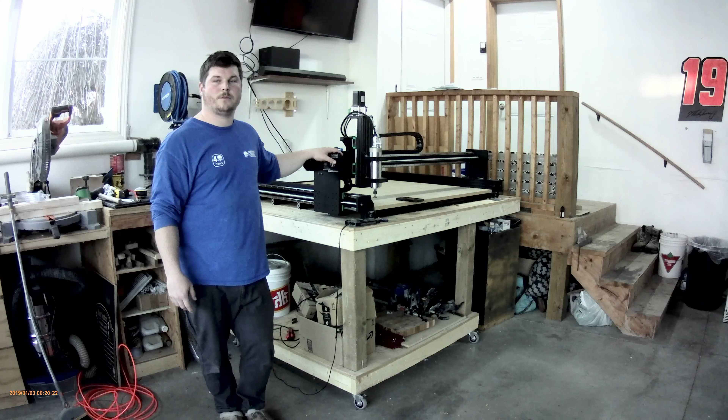Today we're going to surface the spoilboard. We'll jump into Vectric VCarve, and we'll come back out here and run the program. So we'll see you on the other side.

Okay, so we're here in Vectric VCarve Pro 11.013. We're going to have this as a single-sided. We're going to set our width to 48.32, and our height set to 46 inches, and our thickness is going to be 3/4 of an inch. We're going from the material surface, the bottom left-hand corner, and we're going to hit OK.

We're going to make a rectangle here, and it is going to be the same as our dimensions that we made for our workpiece there. So 48.32 and 46. We're going to hit apply. We're going to close out of that, keeping that square selected. We're going to come up here to the alignment tool, and we're going to align to the stock. Close that out.

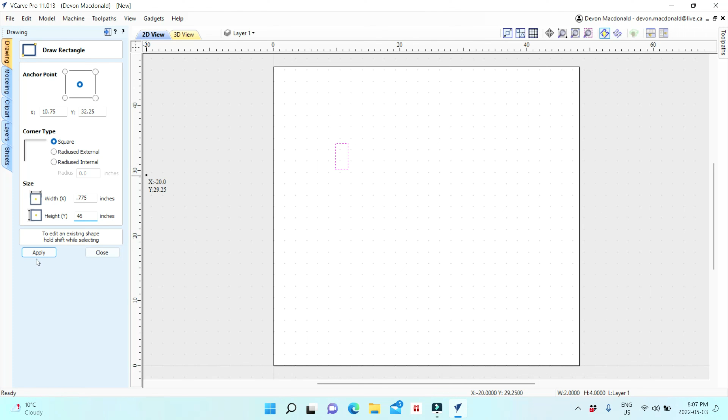I'm going to align that to the stock, and I'm going to move it over to the corner, and it'll snap to our XY position there.

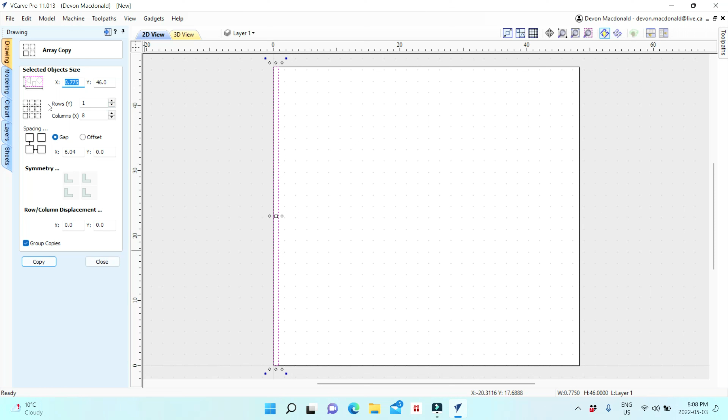Now I'm going to make 8 copies of this, so I'm going to come over here to array copy. We're going to have one row, 8 columns, and we are going to make the X offset at 6.04, and we're going to hit copy. So then it puts all of them where I want them to be.

Now this one is a little out, so I'm just going to ungroup these. I'm going to select this one, and I'm just going to move it over a tiny bit there, just so it's in the box. I'm going to even just snap it to the corner there.

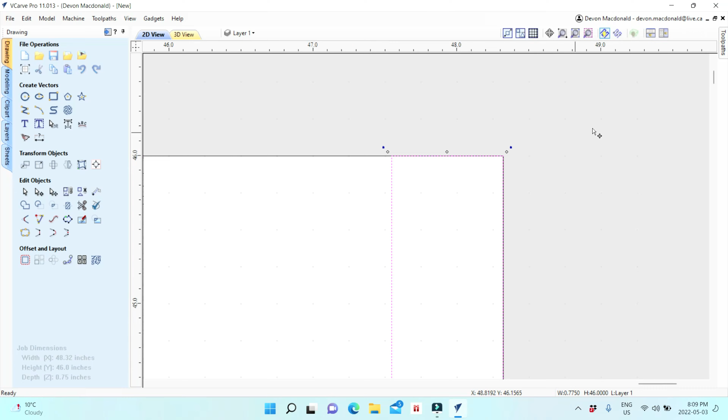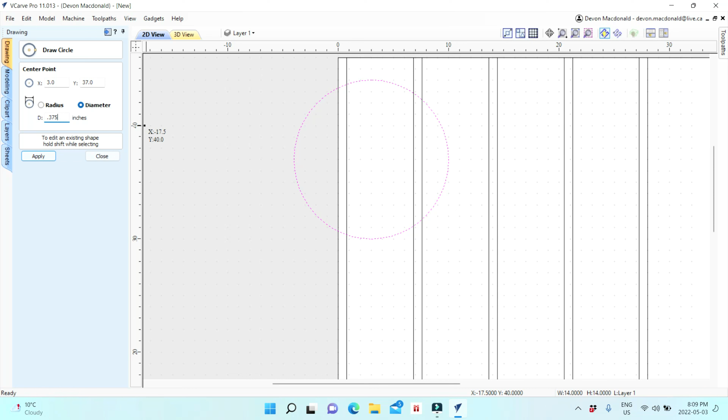Now I'm going to grab my circle tool. I'm going to make a little circle, and it's going to have the diameter of 0.375, because it's 3/8 of an inch, and I'm not changing that. Close out of that, and I'm going to position this down in my bottom corner here.

This will be for my fence. Roughly a 1/2 inch off the edge and 1.25 off the corner.

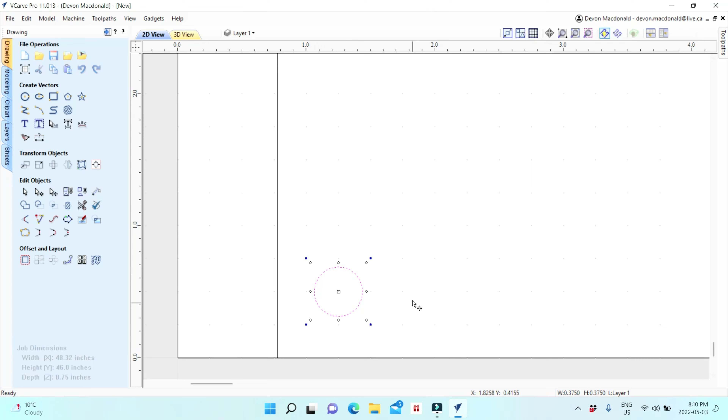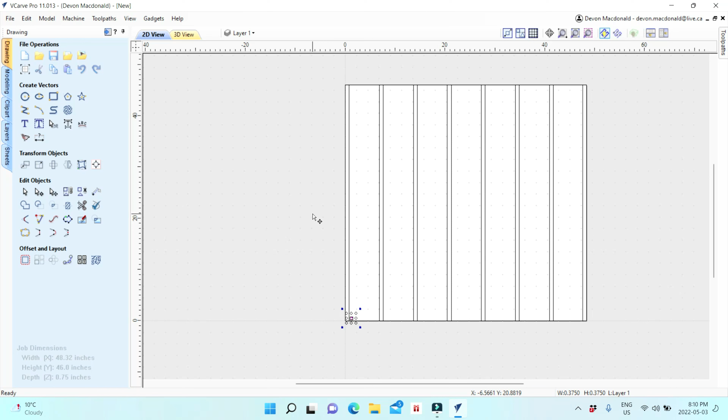So now I'm going to make a copy of these. I'll probably have 8 of them in there as well, on the Y, and 8 of them along the X as well. So we're going to go array copy. We're just going to reverse these numbers, put 8 there for rows, put that to 1, and our spacing is going to be 5.75, and I'm going to hit copy.

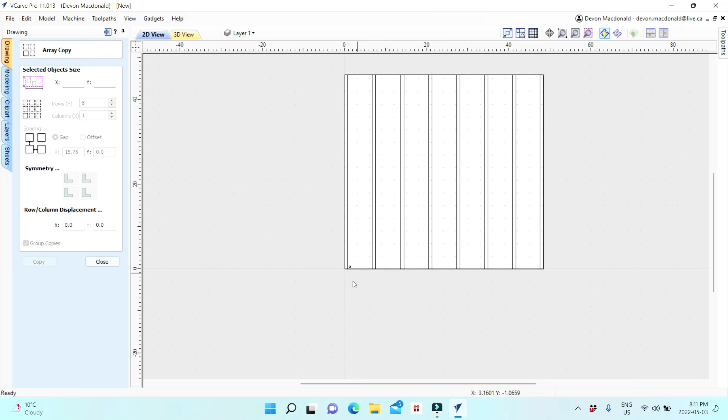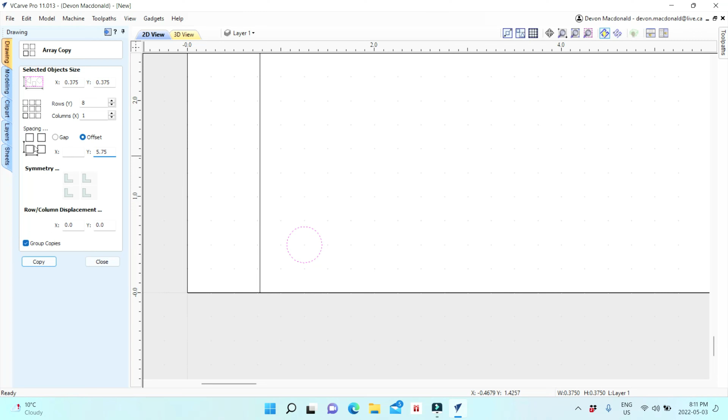That's why I did it on the X, I need it on the Y. Copy. So then I have them along there. And then we're going to reverse these numbers. We're going to put 1 there and 8 columns, and we're going to do it along the X, and it's going to be 6.04. Copy.

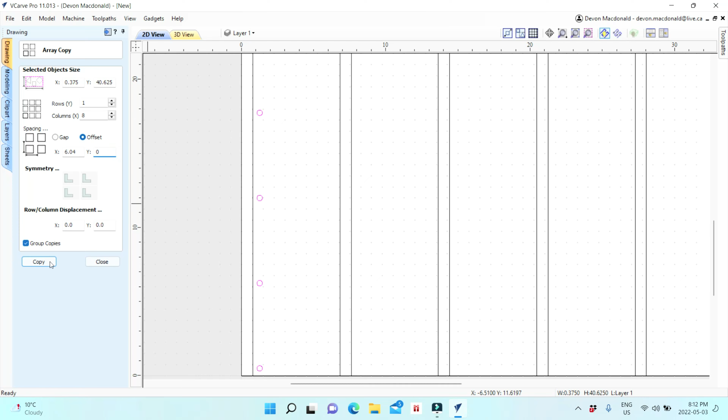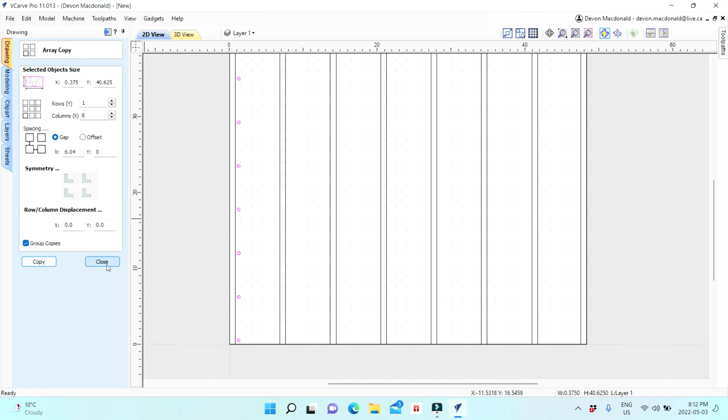And we want this set to be 0. Not sure why it's doing that, 6.04 gap, no. Oh, that's because those are all grouped. So we want to ungroup those. Unselect, come back in here, and we're going to go along the X, and there we go. So these ones ended up inside there.

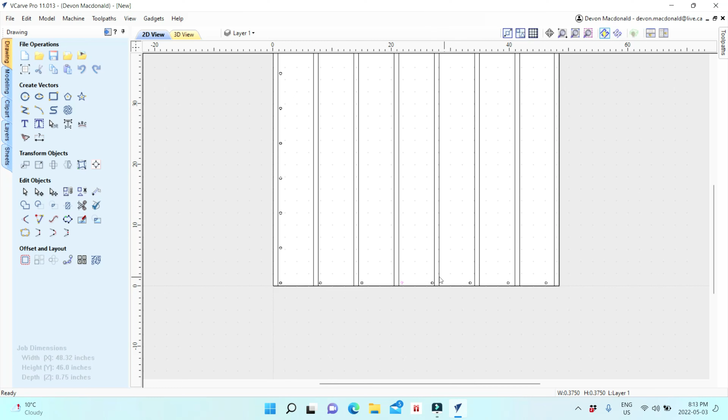So we're just going to ungroup them, grab them, just use the arrow keys, keep it on the same y-axis. This one on the other side. And this one on the other side. I'm actually only going to do 7 down here, we'll delete that one.

Okay, so we're going to make our spoilboard toolpath here first. So we'll select the square at the top, your outside perimeter there. We're going to come over to toolpaths, and we're going to do a pocket toolpath. We'll remove these two. We'll go ahead and select toolpath.

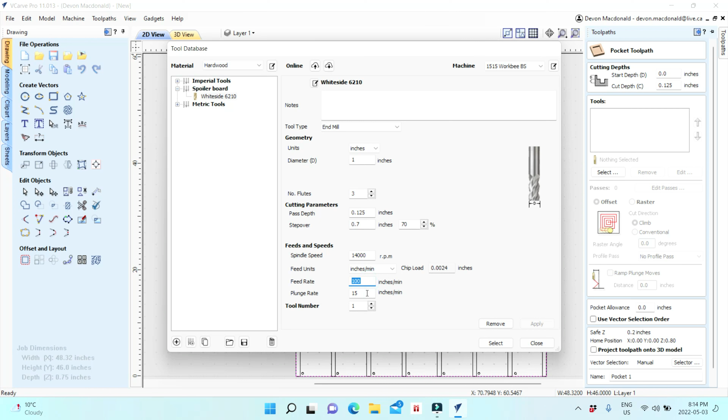We're going to come over here to my spoilboard section there. We're going to get the Whiteside 6210. It's doing a pass depth of 0.125, which is 1/8 of an inch. Our step over is 70%. It's a 1-inch bit, doing it at 14,000 RPMs, a feed rate of 100, and a plunge rate of 15. So we'll select that.

We'll come over here. We're going to do a climb cut. We won't do a ramp in. And we'll go surfacing.

And we'll hit calculate. So it'll show you your toolpath there. And we'll just hit preview all toolpaths. It'll show you the cutting of it.

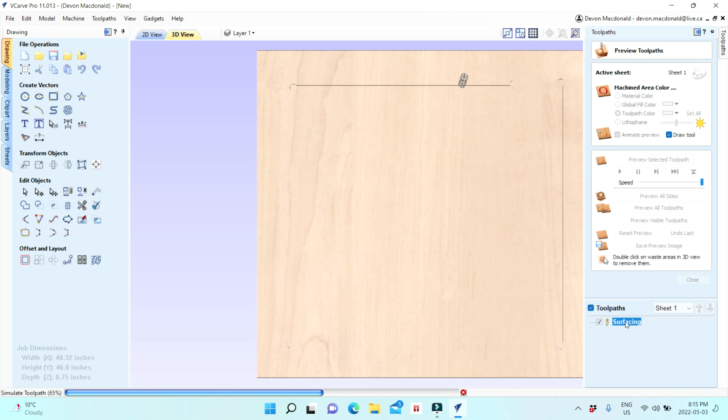If you come down here and hover over this, after that is done simulating, it will take 1 hour and 5 minutes to surface that. So we'll just leave that as is right now.

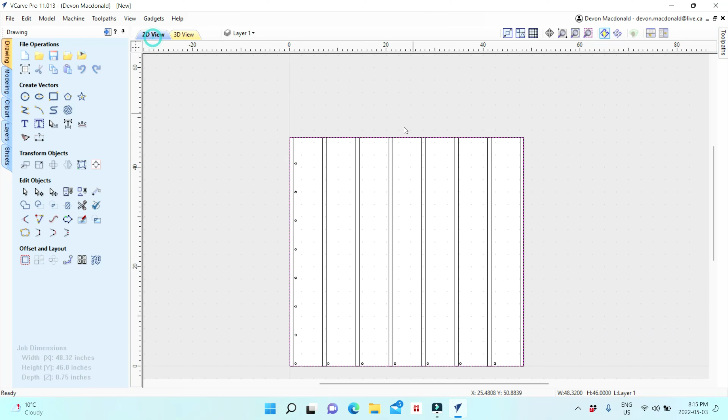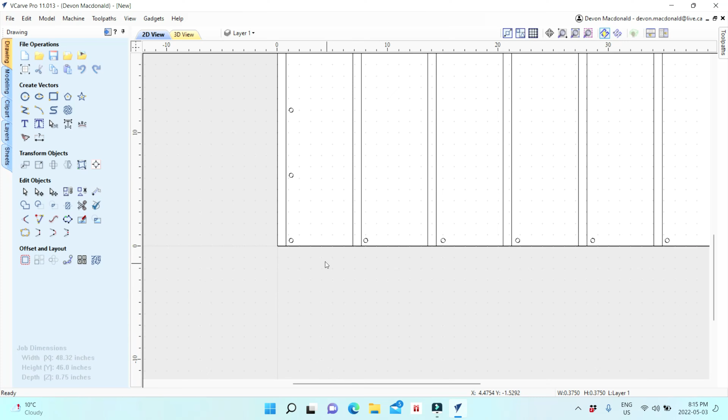We'll come back over to the 2D view here, and we're going to grab all of these pockets and group these back together. So group, and I'm just going to scroll here. Grab all of those. Grab all of these. Unselect those and unselect the outside perimeter, and we're just going to group those.

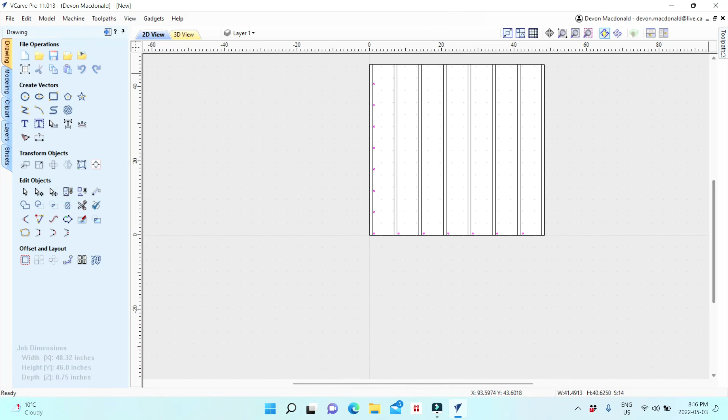We're going to come over here and do the T-Track slots first, and do another pocket toolpath. We're going to remove this one and select a 1/4 inch end mill here. It's 2 flute. I haven't added my new ones to this new computer yet, but it is a downcut bit from Tools Today. I can't remember the number, but it's a 1/4 inch, 2 flute.

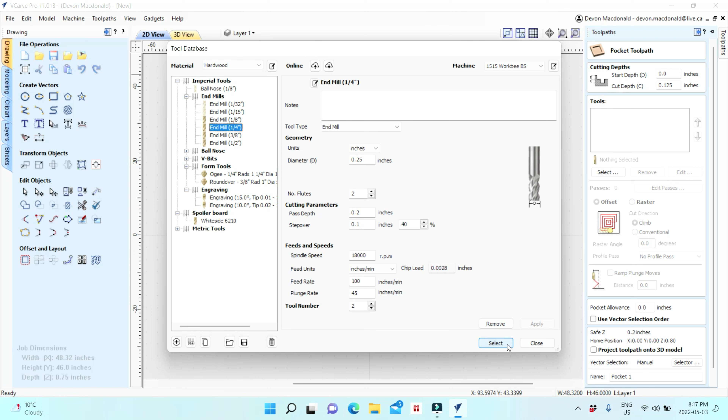Pass depth we're going to do at 0.2. We're going to have 18,000 inches per minute, or RPMs. We're going to do 100 inches per minute with a 45-inch plunge. And we're going to hit apply, and go select. And we're going to go calculate. Oh, I forgot to set my depth. This one we're going to go down to 0.5 inches. Calculate.

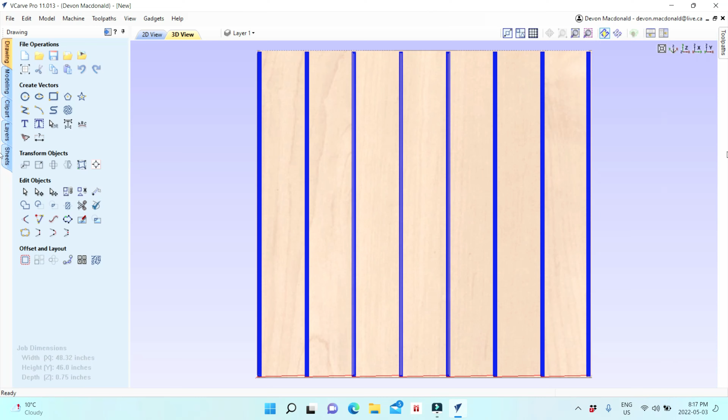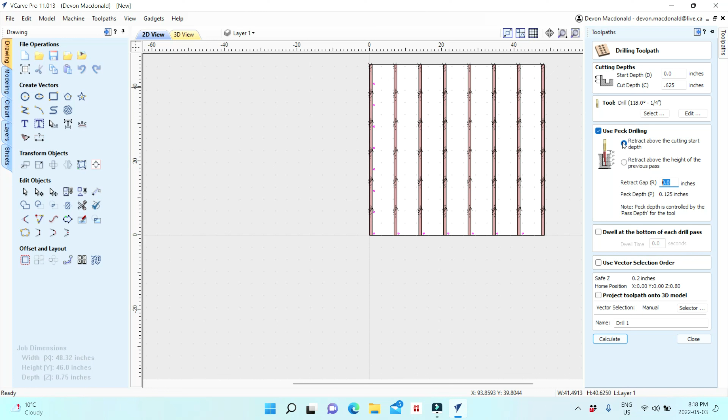Then we'll grab the other ones that are all grouped together, and come over here to do a drilling toolpath. It takes a little bit longer, but we're going to go down 0.625 of an inch, and use a 1/4 inch drill bit with peck drilling. We're going to use an upcut bit for this, hit calculate, and preview all toolpaths.

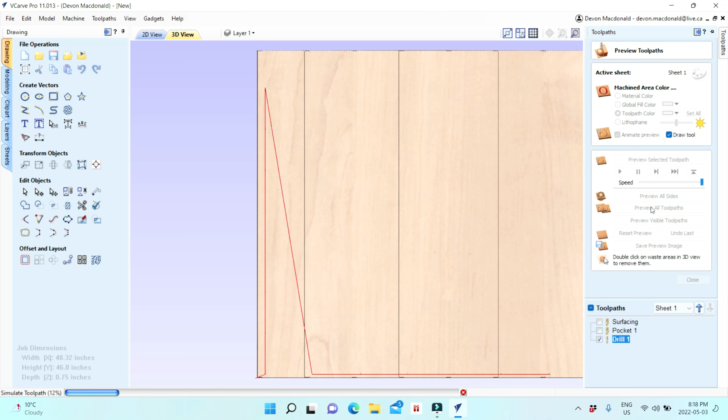Now it's doing the pockets there of the T-Tracks, and now it's drilling the holes. And there you go. So our T-Track will sit right in there, and that's why there was a little lip, because that one's not perfectly parallel with the corner.

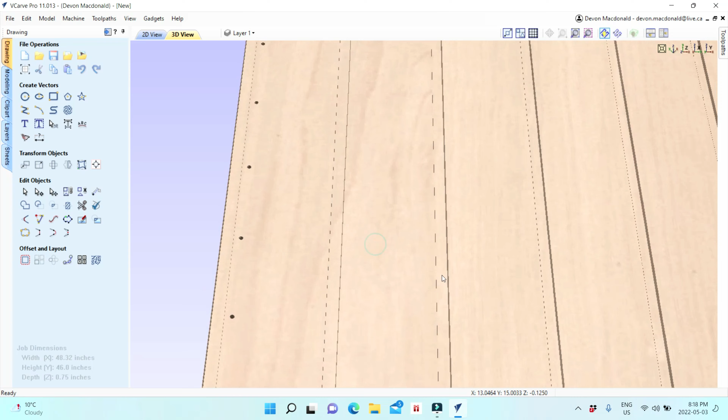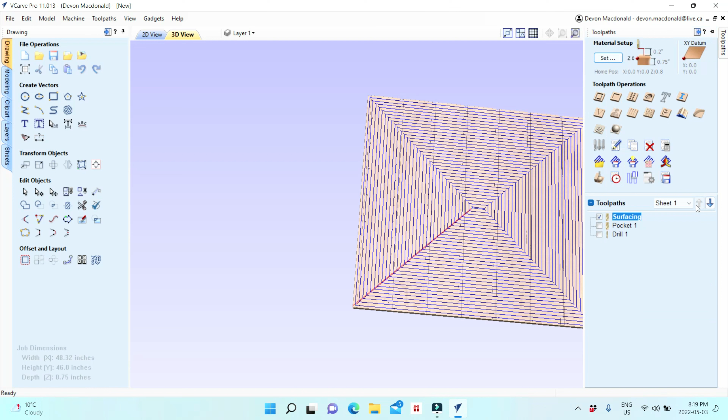But we're going to run our surfacing toolpath just in this first, and then we'll do another video of the T-Track and the fence install. So let's take this file here. We're just going to unselect these two. We're going to take this one, our surfacing one, close out, and save toolpath. We're using the Openbuilds controller.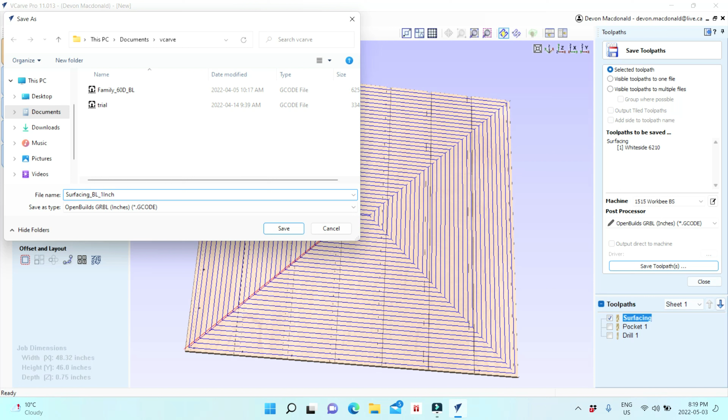And we're going to go save toolpath. We're going to save it in Vcarve, surfacing. I like to give it bottom left corner, 1 inch bit, and save.

Now I'm just going to open up my folder here. Actually, I just want to see if G4P8, so it pauses my spindle for 8 seconds so it can spindle up to the 14,000. That's what I wanted to see. So we'll take this G code out to the Openbuilds controller and run this.

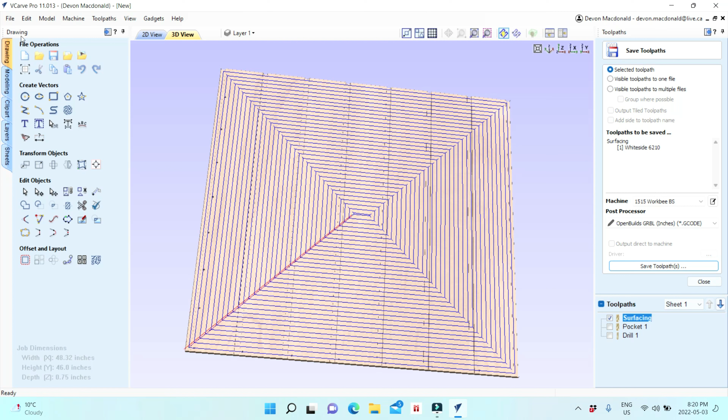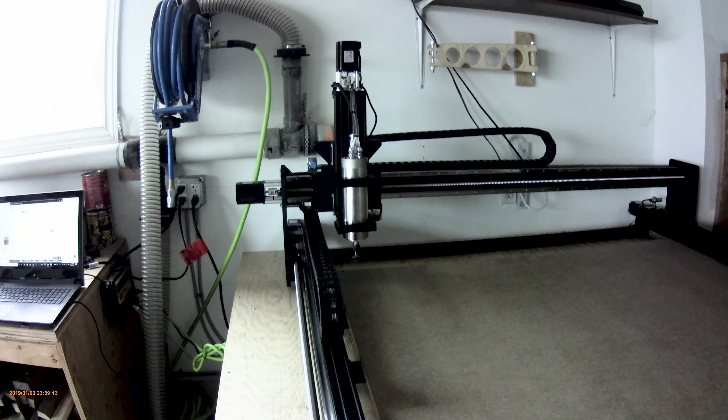Okay, we're back out here in the shop, and we're just going to home all our devices here on the interface. So we're just going to click home all axes. There goes the Z. There goes the X and the Y. And we got everything homed.

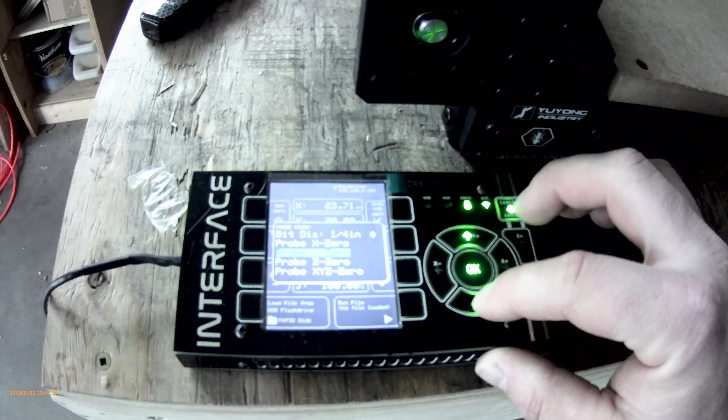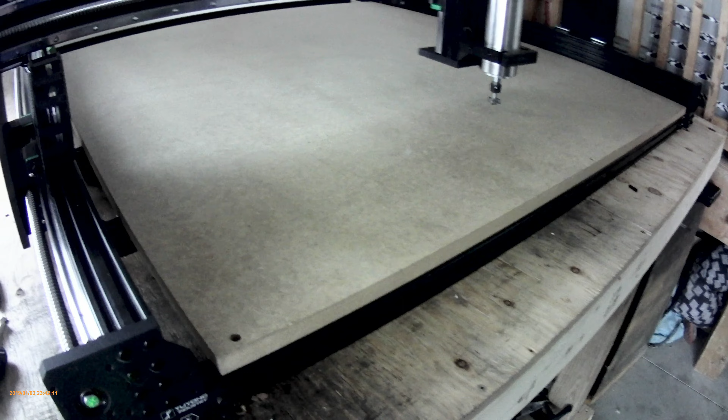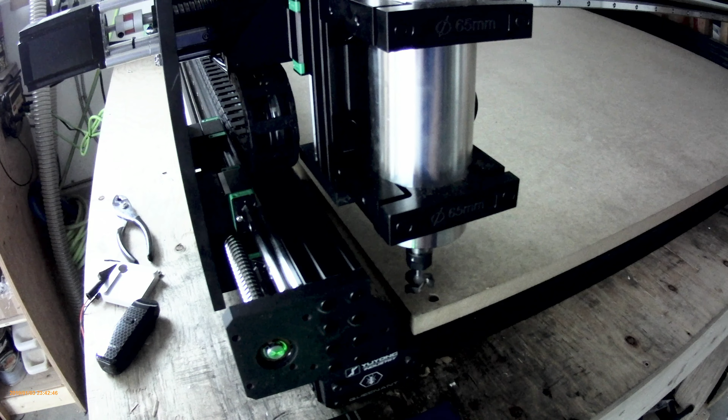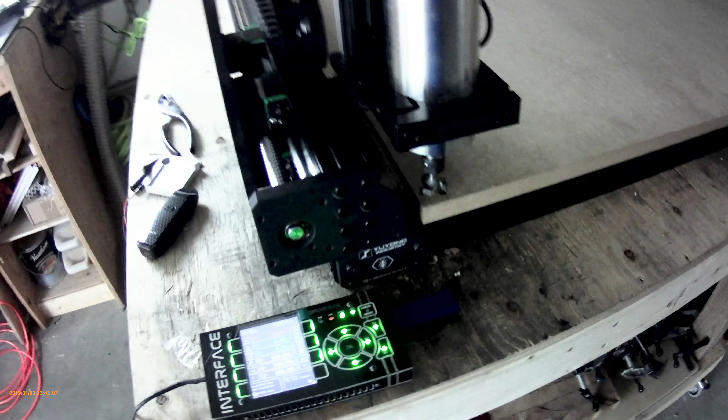I'm going to take this back. Zero here, on the X and the Y. Everything zeroed out there. And I'm just going to set you up on the camera here, and we'll surface.

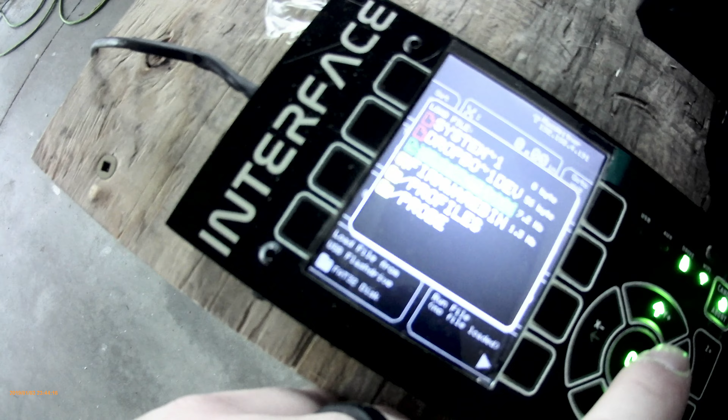We're going to go load file here. We're going to go down to the surface there. We're going to hit OK. And we're going to hit run file. It's going to go up. Spindle's going to speed up to 14,000 RPM. It's going to pause so it can spindle speed up. Here we go.

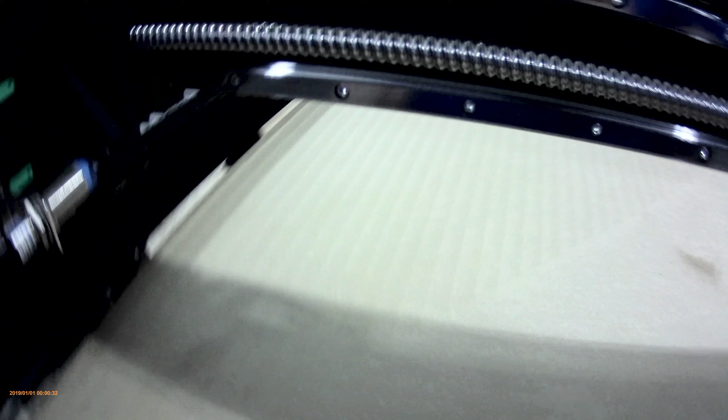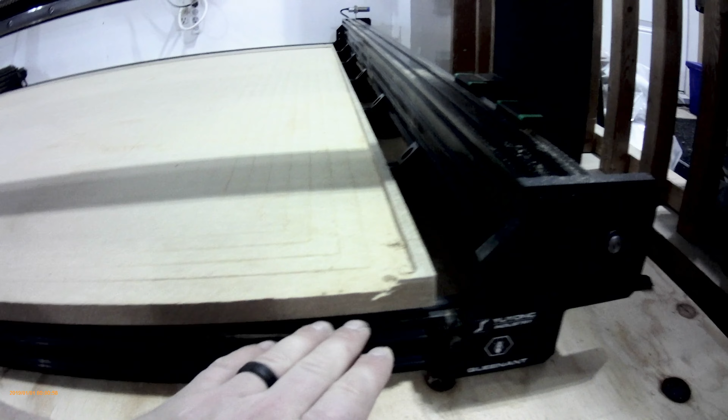So I'm not sure when it got cut off, but as you can tell, this thing is smooth. There's a little bit of a ridge here going along the Y, so it means that this has to be adjusted on the X, and this is why I did not like mounting it to the actual rails below, because this popped off out of the T-nut. So what I'm going to do is, just temporary, run a straight edge across here and shim this up until I get my dust shoe made, because it sucks holding the hose the whole time.

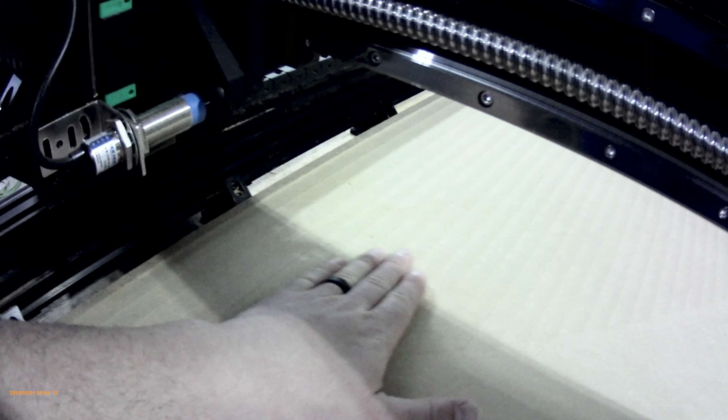But I must say, this machine just flew through this material. It felt like 20 minutes, though it was probably around an hour. There's not a single ridge here along the X, which is nice. But one thing I am noticing as well is that this ridge here and here on both the X's and the Y should not be there, because I programmed it large enough that it would clear this out. This would have been the final pass.

So the machine needs to be calibrated. It's set to 160 steps, I believe, so we'll have to do a test piece, probably a 100 mil by 100 mil square with a depth cut, and get our true numbers for these ball screws. But other than that, I'm quite impressed. Other than this kind of sucks, because that means I'll have to do this all over again, but just temporarily I'm just going to straight edge across and shim this up here, because I don't want to do it again without a dust shoe, and that's really annoying, but it is what it is. Anyways, thanks for tuning into this video.

Next video we'll probably be cutting in our T-Track and our dowel fence. So stay tuned for that.